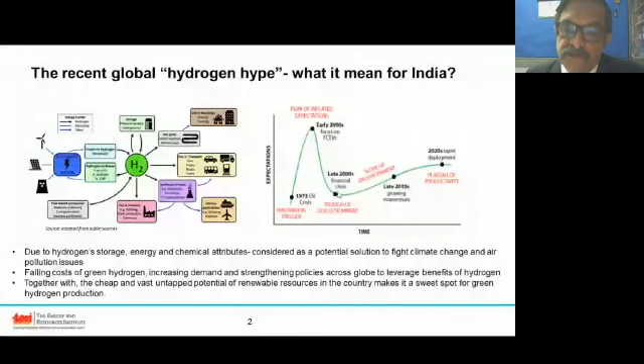Banaras Hindu University and IIT BHU did develop some onboard storage for motorcycles and three wheelers using composites, and Dr. Srivastava ran a lot of vehicles on this. So there were some R&D programs going on in India, and globally also, but the late 2000s financial crisis slowed down this movement until say 2010 or so.

But then it started moving again because renewable energy started moving fast, and also the need is felt that we cannot ignore climate change issues, and we need to switch from conventional fossil fuels in a reasonable period of time. That's where hydrogen also started developing.

And currently, as mentioned by Ms. Gauri Singh, there are 7-8 countries who have ambitious plans for hydrogen, particularly Japan and Australia, who are looking at transferring hydrogen from Australia to Japan through sea route. These are really ambitious plans of scale.

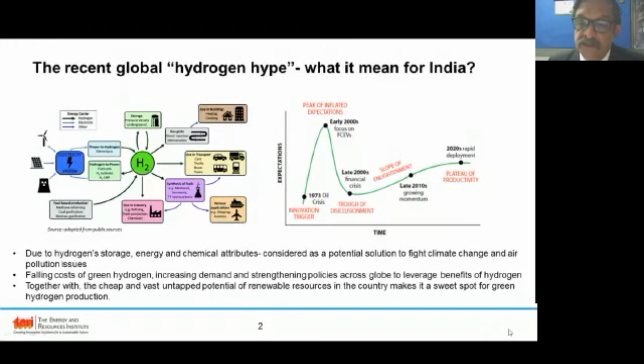So the falling cost of renewables is also resulting in reduced cost of green hydrogen. There is a vast potential of renewable resources which can give us a sweet spot for green hydrogen production.

In our study, we did some simulation using current cost, projected reduction in cost, and also the change in technologies. We have concluded—and this report was released a couple of days back on the hydrogen economy, prepared by TERI.

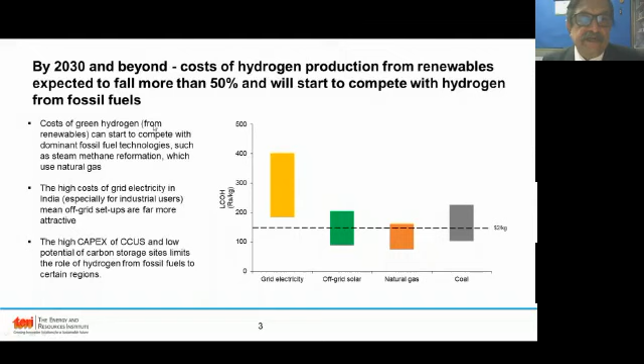The cost of green hydrogen will start competing with fossil fuel technologies such as steam methane reformation of natural gas somewhere around 2030. You are looking at $2 per kg cost from off-grid solar around 2030, which will be competing with natural gas and coal gasification processes.

Currently these processes are not using carbon capture and storage or utilization technologies, and if they start using that, the cost will also go up, particularly for coal. The cost of generation from conventional current grid electricity is high because we have a high percentage of fossil fuel based electricity, and grid electricity costs are quite high.

What we are looking at is off-grid, or mini grids or small grids, which can be set up at far more attractive pricing, and this will generate low cost hydrogen. It will also have the benefit of decentralized applications, so you can generate it wherever required, and that probably will be a good strategy in future.

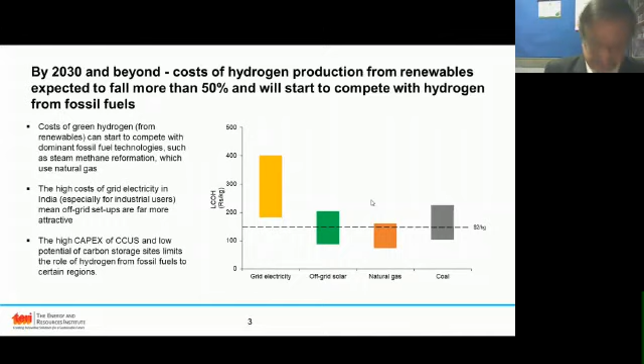Now, if cost has to come down, one also has to look at how hydrogen will be utilized and how the market for hydrogen will grow. Because if the market for hydrogen grows, then the requirement grows, and then the economy of scale comes into picture.

Currently, our demand is about 6 million tons per annum, mainly for fertilizers and refinery applications. There is also hydrogen required in food and other industries.

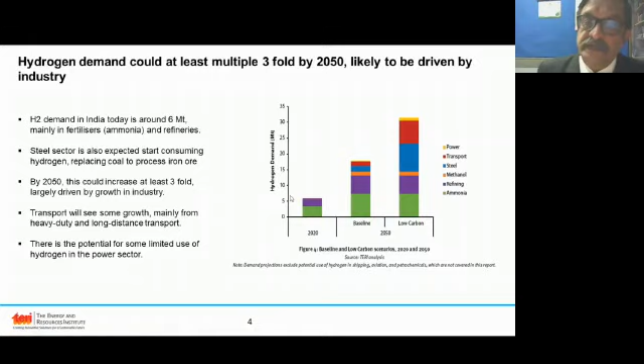What we are also looking at is the steel industry, which is a hard to abate sector for decarbonization, because it uses coal or coke for the reduction process to produce steel, producing a lot of carbon dioxide. So companies like Tata Steel, and global steel companies, are looking at hydrogen-based reduction processes, which will be integrated for steel manufacturing in coming years, and that will give a big boost to hydrogen utilization.

We are expecting about a threefold increase in requirement, up from 6 to something like 18 million tons by 2050, and most of it will come from industry—low carbon industries where ammonia, refining, methanol, and steel dominate, with transport and power being a small part of it.

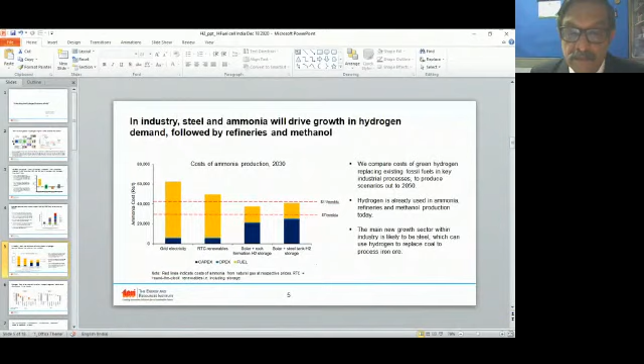So similarly, we are looking at the cost of ammonia.

Sorry, Mr. Girish ji, I think some people whose mics got turned on during your presentation disturbed it. Sorry for that. Yes, please continue, sir, I hope. Okay, I was wondering how to tackle it, but yes, sir, absolutely, thanks a lot. No problem. Let us continue.

I hope my screen is available. Absolutely, sir, your screen is screen sharing, available.

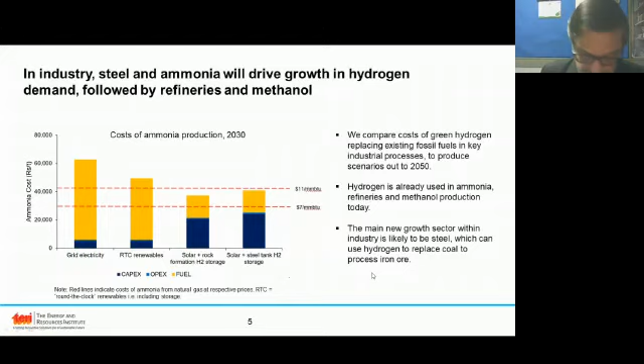So one is looking at ammonia production and steel industry, which will drive growth in hydrogen demand, followed by refineries and methanol. The main new growth sector within the industry is likely to be steel, which is right now not using hydrogen. We are also looking at ammonia production cost coming down using both solar and different types of technologies, grid electricity, round the clock renewables - that is renewables with storage, maybe pump hydro or large scale battery storage, and combinations of solar and storage for rock formation or steel tank hydrogen storage. These are some cost estimates for 2030 based on our detailed analysis, which you can access through our report.

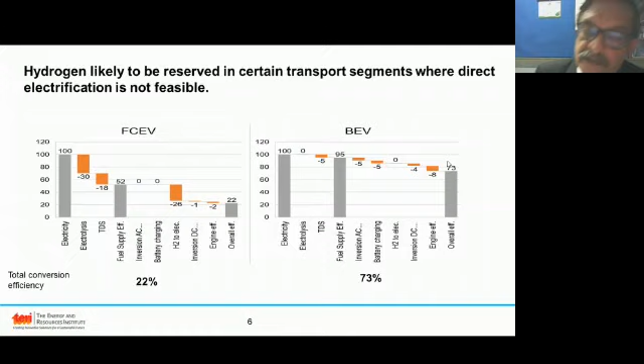Now what is also important is use of hydrogen for transport. We have compared the overall conversion efficiency of fuel cell electric vehicles and battery electric vehicles. In hydrogen electrolysis it's about 70% efficiency. So from an electricity perspective, 100% electricity gives you 70% energy utilization, with 30% loss. Then you have other losses, so overall efficiency at the end is about 22% in FCEVs, whereas in battery electric vehicles the same efficiency is around 73%. This means for smaller vehicles, battery electric vehicles will be cheaper and more energy efficient.

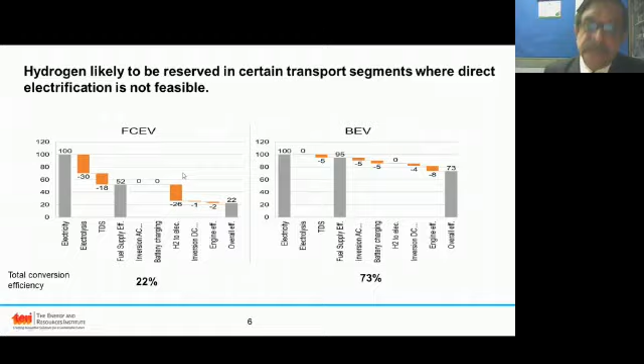But when you look at the long term, some of these are going to be cost effective or even energy effective. So total cost of operation, looking at different time frames - 2020, 2030 and 2050 - for petrol diesel vehicles, CNG vehicles, electricity and hydrogen vehicles, you will find that for four wheelers, it is still very expensive to use hydrogen until 2030.

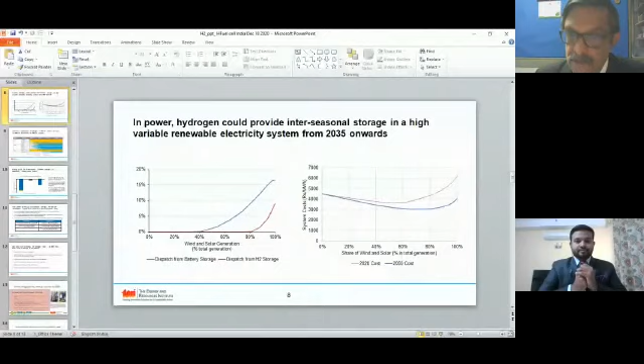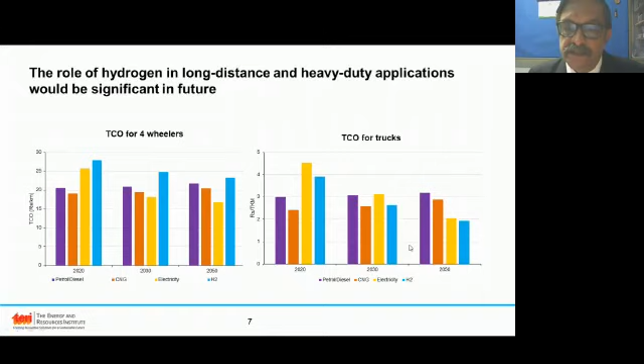I was just going through the study which we did on total cost of operation for four wheelers and trucks, and you will see here very clearly, in case of trucks, by 2030 itself, hydrogen is competitive to diesel, and maybe by 2050 it will be one of the cheapest options for fuel in terms of long distance and heavy duty applications. This is also important to note that these applications need a large capacity of fuel requirement, and that's why hydrogen probably becomes more cost effective.

The second thing that's important is hydrogen as storage. If you are looking at hydrogen as short-term storage, then probably it is not cost effective. But if we are looking at more and more green energy coming into the grid - grid connected solar and wind generation, today around 6 to 7% - the moment it goes above 80%, then hydrogen storage as energy storage becomes cost effective compared to battery storage. This is how our study has analyzed it, but system cost also matters.

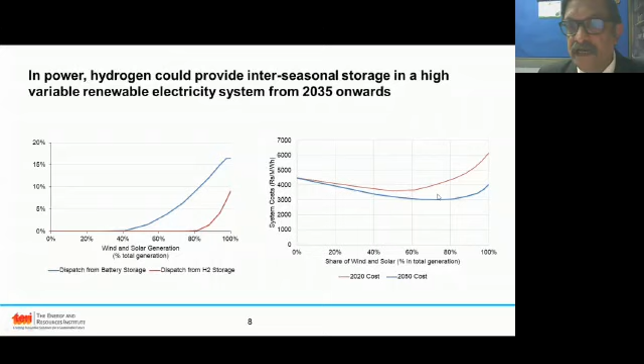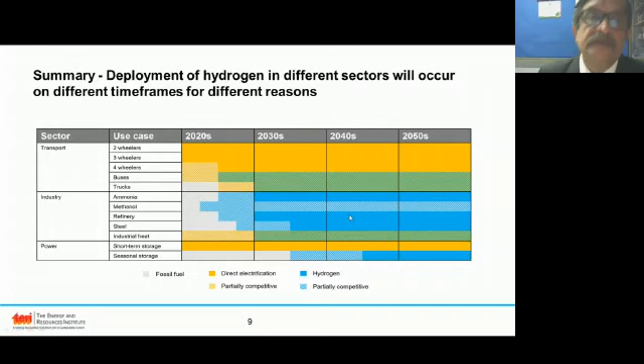By 2050, one has to see how much percentage of electricity comes from variable renewables, particularly wind and solar, which are our main renewable energy resources for power generation. When the percentage goes above 60 to 80%, we will have hydrogen as a cost effective storage system. In short, these are the areas where direct electrification versus hydrogen will be competitive or partially competitive. For two-wheelers and three-wheelers, direct electrification is effective. For buses, partially you will have hydrogen coming into the picture, but for seasonal storage or industrial applications, hydrogen can become cost competitive, and there can be a good market for green hydrogen in these applications.

So what we are looking at is how we can reduce fossil fuel consumption by 2050. Currently we import 38% of our total primary energy, which includes heating, cooling, and other applications. 30% of that import is coal for power generation, 85% is oil, and 50% is natural gas. So 85% of our oil requirement is coming from imports, and 50% of our natural gas. If we go for domestically produced hydrogen through renewables, we can substantially reduce these requirements by 2050 with an ambitious green hydrogen plan, and we can reduce our total import cost by around $20 billion.

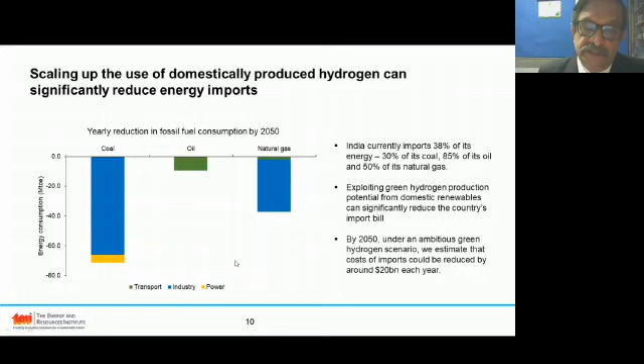So if we really want to achieve something like this by 2050, we have to put in place policies, regulations, R&D, and other efforts right from today. I think the government is also seriously thinking about it - there is a committee for a new hydrogen mission being launched by the central government, and we hope that will come out soon. What we recommend is we should step up manufacture of hydrogen and fuel cell technologies, moving from research to commercialization.

And I'm happy we have Dr. Raj Lakshmi, whose research center is already moving in this direction, and we are looking at working on joint projects with them and with ARAI for actual applications of hydrogen fuel cell in electric vehicles and other applications.

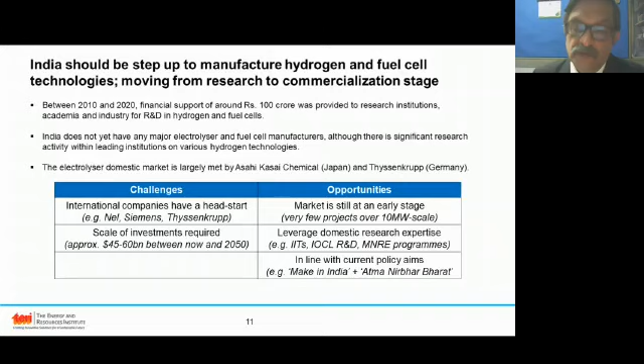It will also need a lot of investment, which we estimate around 45 to 60 billion dollars between now and 2050. We can leverage research expertise from IITs, IOCL R&D, which has been working for a long time on this, MNRE programs, and policies like Make in India and Atmanirbhar Bharat.

So we feel it needs great cross-sectoral coordination between various ministries, Ministry of Oil and Natural Gas, Ministry of Petroleum, Coal, Electricity, Power Ministry, MNRE, etc. Also a lot of international collaboration and funding support for value chain demonstration, development, and capacity building.

As somebody mentioned in the question, Germany has set up about 488 hydrogen filling centers to create a market for transport. In India, that may not be a priority. What we probably should look at is hydrogen generation and storage, and bulk use of hydrogen at one place, for example in industries, which will create a competitive market segment to start with.

And we should also have support to shift from pure R&D to commercialization. Dr. Raj Lakshmi will, I think, speak more about it.

We have to create a market through policies, mandates, and standards. Dr. Gauri Singh mentioned RPO for renewables, which created a certain market push. Something like that is being thought about

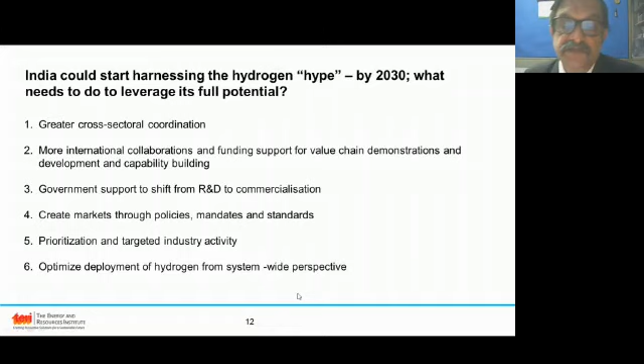And we have to target some industry activity which will create large demand for hydrogen, and then optimize the deployment from a system-wide perspective. So that's our kind of recommendation on this.

Quickly, what we have been doing at TERI since a long time - we have been working on hydrogen energy systems since early 2000s, and before that fermentation of biohydrogen from sugar, and we have been generating hydrogen and running a fuel cell pack of 2.5 kilowatt capacity.

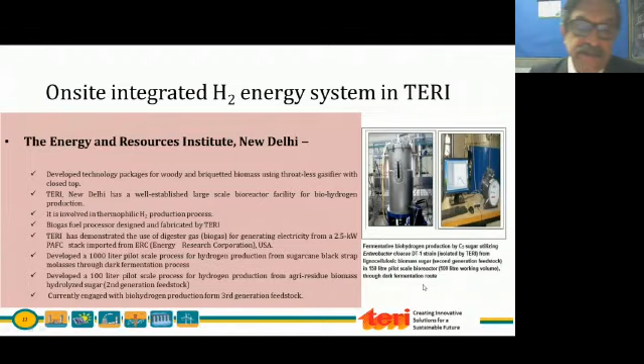Of course, this was discontinued because of funding and other issues. But we have had hands-on experience on hydrogen. We tried biogas coming out of sewage waste, and with a fuel processor we developed, we generated hydrogen for this fuel cell pack.

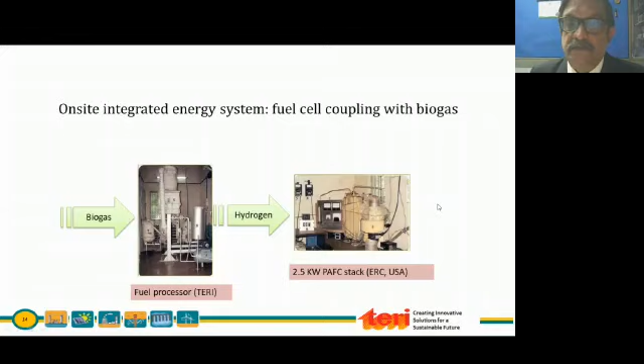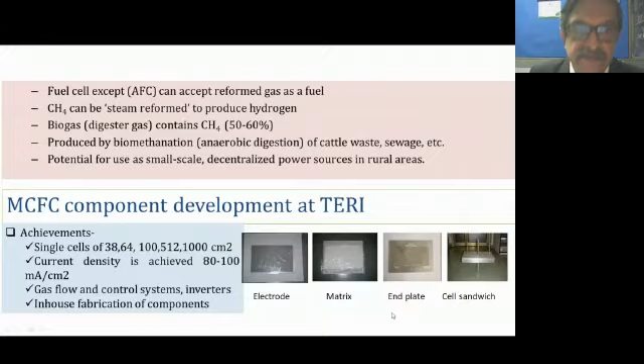We are also doing, as I mentioned, development of fuel cells early in the 1990s. There was a fair amount of success, but we have not really continued with it right now. So right now we are working on

the biomass route for hydrogen generation, and we are also working on developing some applications for hydrogen under joint projects, and we are happy to collaborate with industry and research institutes to develop new projects and initiatives on hydrogen.

We have also collaborated with a Norwegian company for setting up a center of excellence for hydrogen. There is a research proposal which is pending for approval.

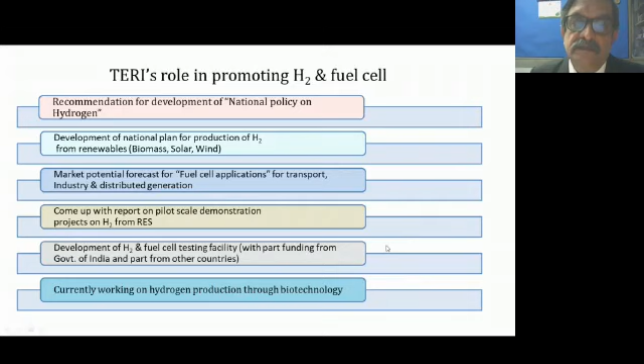We are also collaborating through an MOU with an electrolyzer company for generating hydrogen. And since almost 6 months ago, we started a policy brief for the Government of India, and now this report on 16 December which we have published.

We are also working with the International Policy Institute of Japan, where we will be organizing a third seminar in February, March for hydrogen fuel cell.

And last year we had a very good workshop in February 2020 where Toyota displayed their hydrogen fuel cell vehicle, and there was good interaction between Japanese experts and Indian experts. We look forward to good participation. This year it will be hybrid, with some conference online plus physical presence, most likely in Delhi.

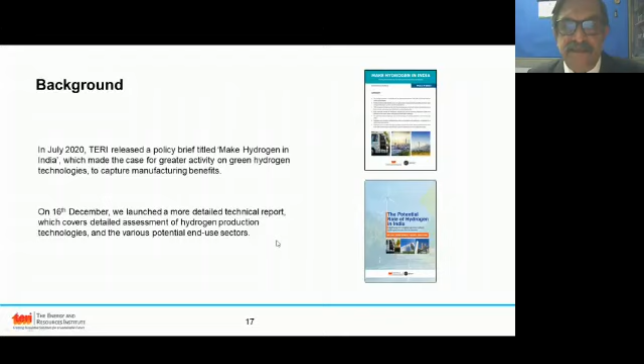So these are some of the efforts which we are taking, and we look forward to more interaction with industry. Thank you very much. I will also mention here my

team which is working - Mr. Wilhal and Rajneet and Shruti Dayal. They are my team members who are working on hydrogen fuel cell initiatives in TERI, guided by Mr. Girish Sethi, who is our program director, and Dr. Ajay Mathur, the Director General of TERI.

So I will stop here and thank you.

Thank you so much, sir. Thank you so much for that great presentation that you gave. Can you hear me, sir? Yes. Thanks a lot for this. Yes, thank you so much for that presentation. Sir, we have a few questions if you would be willing to answer some of them, sir. Yeah, sure, I'll be happy.

We have a question from Miss Neha Bajaj, who is the managing director of Scroll Mantra Private Limited. Her question is that in terms of FCEVs, you say, sir, that the long haul trucks would be greatly benefited by fuel cell technology. Would that mean that along the highways you will have a lot of hydrogen refueling stations? Wouldn't that be a convenience benefit for the small passenger carriers to actually have convenient hydrogen refueling stations located across the highways? And if we talk about efficiency versus convenience, wouldn't convenience supersede efficiency?